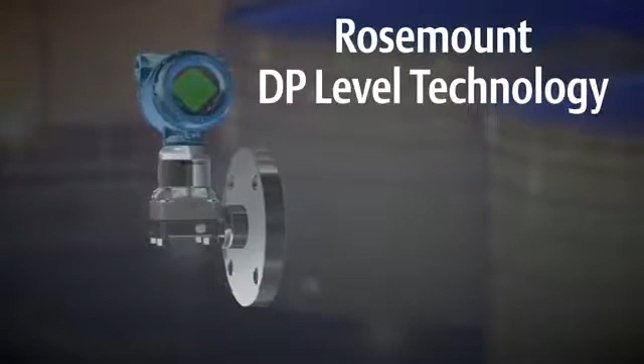In every plant, proper tank level measurement and control is crucial for successful operation. An incorrect reading could mean an increase in operating costs, a decrease in efficiency, and a higher potential for safety hazards. Rosemount DP level technology, featuring remote diaphragm seals, is designed to help mitigate these potential issues.

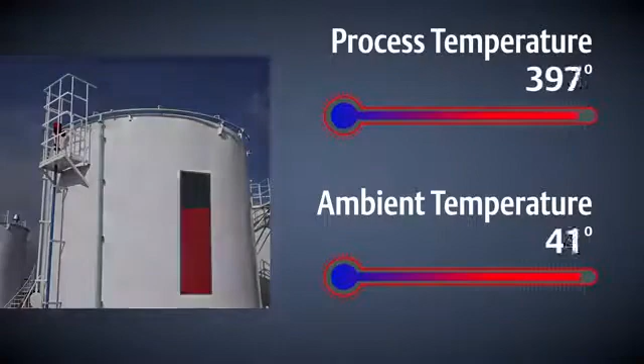The operating range of a remote seal system is determined by the fill fluid that transmits pressure from the process to the pressure sensor. Applications with very high operating temperatures require a fill fluid that may not function properly in low ambient temperatures. At these lower temperatures, time response to pressure changes can be too slow for process control, or the unit could stop responding altogether.

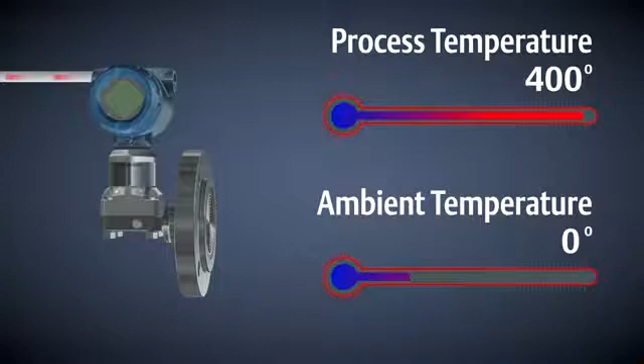Traditionally, this has been solved by using heat tracing, which is complicated and expensive. The new Rosemount Thermal Range Expander eliminates the need for heat tracing.

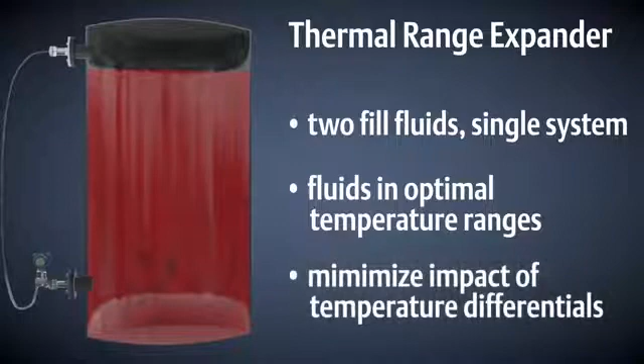The Rosemount Thermal Range Expander utilizes two fill fluids in a single system, allowing each to operate in their optimal temperature ranges, minimizing the impact of low ambient temperatures. An intermediate diaphragm is used to separate the two fill fluids. A high-temperature fill fluid is next to the hot process fluid, which keeps it warm enough to stay in its optimal temperature range. Then, the secondary fill fluid, which is selected to operate over a wide ambient temperature range, can be used throughout the rest of the system.

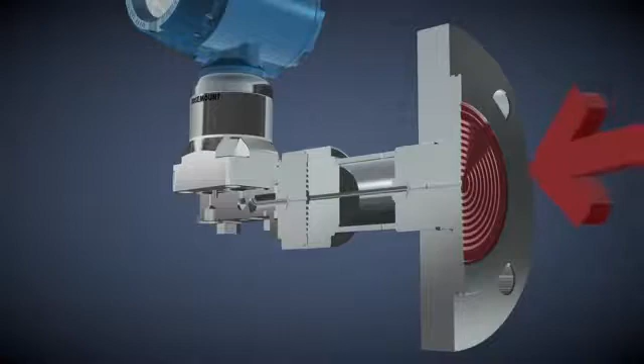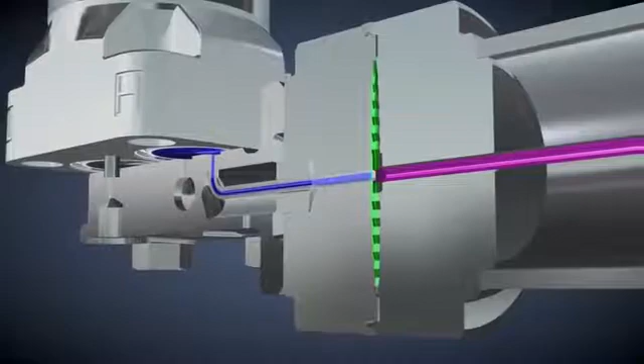Let's look at how the thermal range expander operates. The process fluid applies pressure at the outer diaphragm. The pressure is transferred across the high-temperature fill fluid through the intermediate diaphragm, across the secondary fill fluid, and finally to the pressure sensor, which sends a signal to the control system.

Adding a second diaphragm has minimal effect on performance due to the large diameter of the inner diaphragm and the small amount of fill fluid between the outer and inner diaphragm.

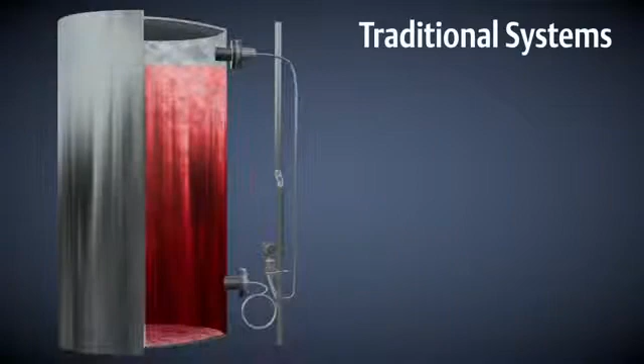In traditional systems, a single fill fluid capable of meeting the high temperature of the process is used throughout the whole system. To avoid having time response issues, electric heat tracing is often used to keep the fill fluid that is farther away from the hot process warm enough to make the measurement.

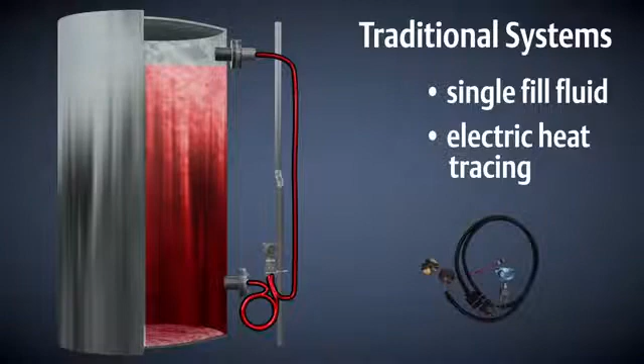This type of heat tracing has a number of issues, including: high installation cost due to extra equipment required, including wiring and controllers; increased operating costs due to high electrical power requirements; and ongoing maintenance costs due to reliability issues.

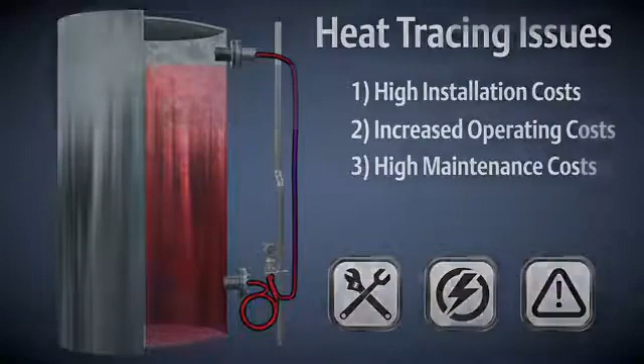Because of the thermal range expander's dual fill fluid design, the need for heat tracing is eliminated in high-temp applications.

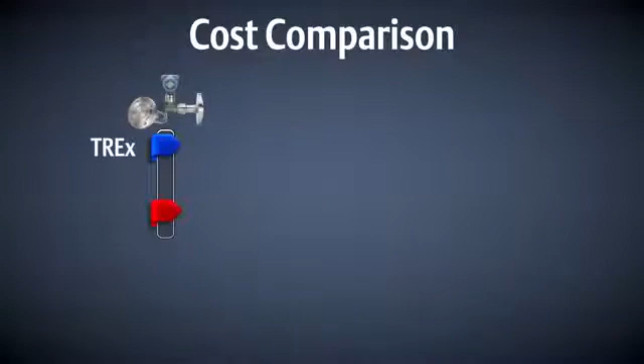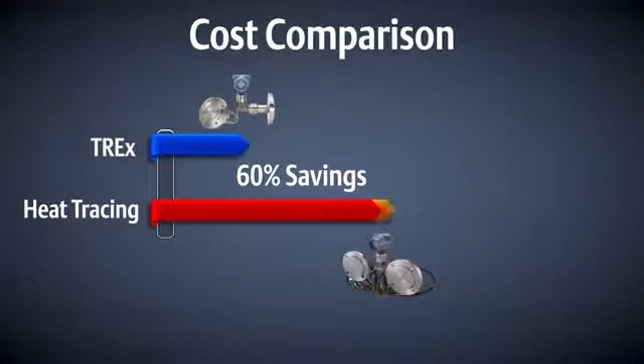Let's compare the cost between the thermal range expander and heat tracing. When you consider the extra cost of the heat tracing itself and the controller, a 60% cost savings is realized with a thermal range expander. This doesn't include the ongoing operating and maintenance costs associated with heat tracing.

The thermal range expander is available in multiple configurations. It can be used as a direct mount or as a remote mount with capillary. It's available with any Rosemount DP level technology, including the Rosemount 3051S electronic remote sensors ERS system, the Rosemount tuned system assemblies, or with a balanced system.

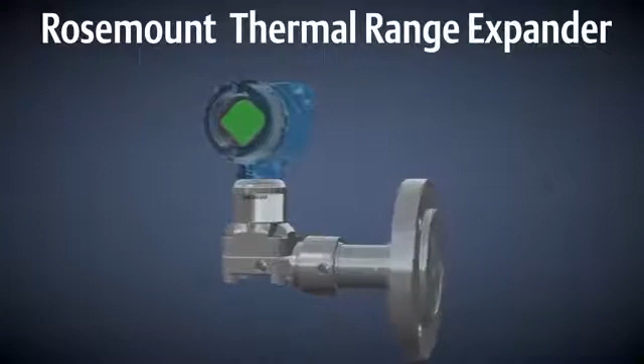Consider using the Rosemount Thermal Range Expander whenever an application involves extreme process temperatures and varying ambient temperatures. This innovative technology allows you to reduce installation, maintenance, and operating costs while providing a simplified, high-performance DP level solution.